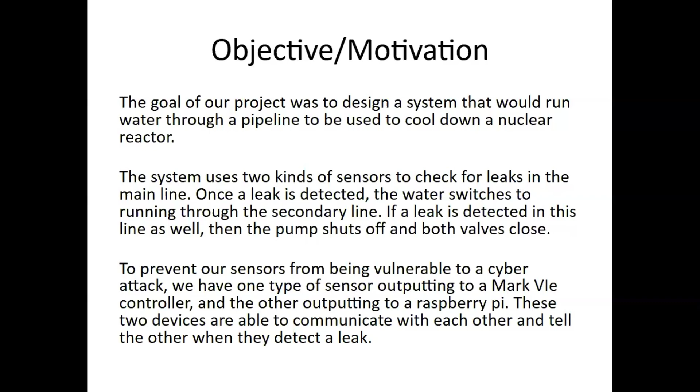To prevent our system from being vulnerable to a cyber attack, we have one type of sensor outputting to the Mark VIe controller and the other outputting to a Raspberry Pi. These two devices are able to communicate with each other and tell the other when they detect a leak. So if one is messed with, the other should still be working properly and is able to tell the first system that there's a problem.

Our project goals and deliverables are that the system needs to be able to detect a leak in the pipes and shut off the system as needed. It needs to control flow rate based on these readings, and it needs to be secure from the outside environment and from cyber threats. We needed to have an emergency shutoff and have it be operational in case of environmental or cybersecurity issues.

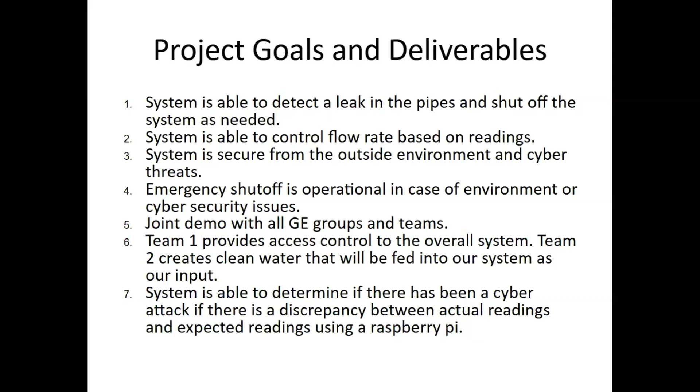We also needed to have a joint demo with all GE groups and teams, where Team 1 would provide access control to the overall system, and Team 2 would create clean water that would be fed into our system as our input. Our system also needed to be able to determine if there had been a cyber attack if there's a discrepancy between the actual readings that we were getting from our sensors and the expected readings we got from the Raspberry Pi.

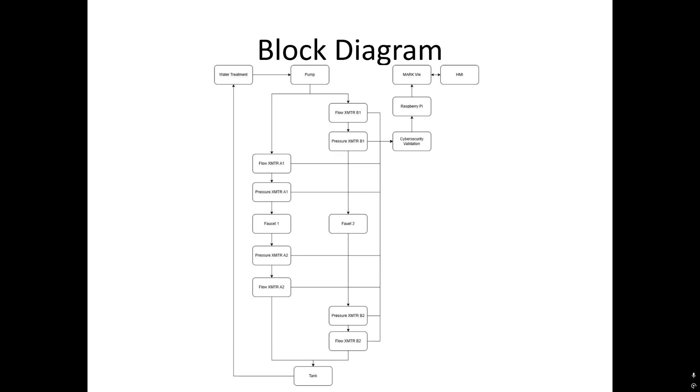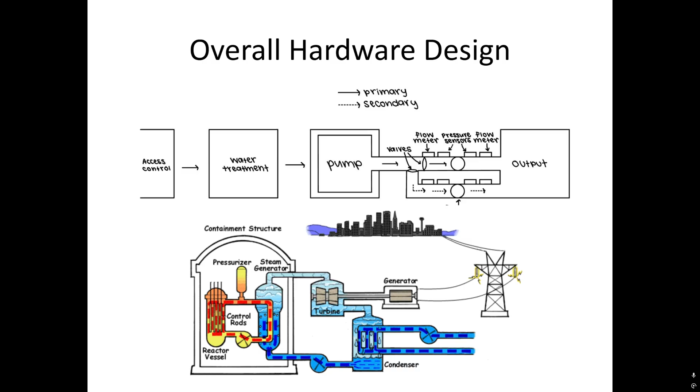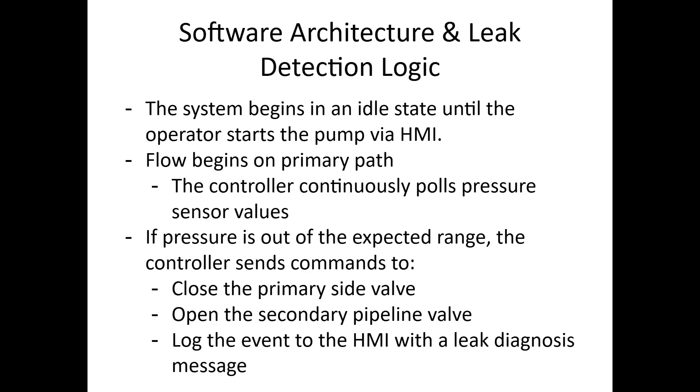So here we have our software architecture. The system begins in idle state until the operator starts the pump via the HMI. Once the flow begins in the primary path, there are multiple pressure sensors being polled. And if the pressure is out of the expected range, then it'll close the primary side valve, open the secondary side valve, and log the event in the HMI. If the secondary line leaks, the system then just shuts off. It closes both valves and shuts off the pump.

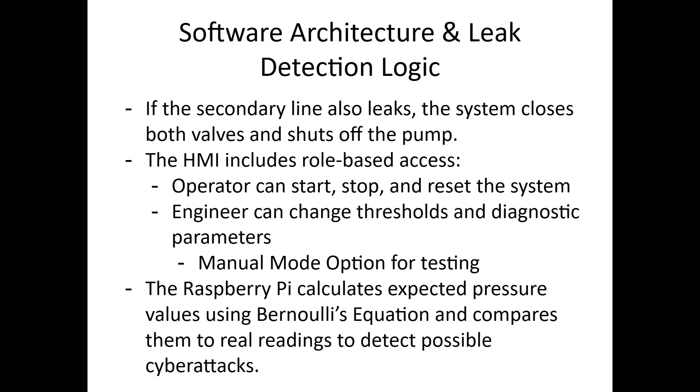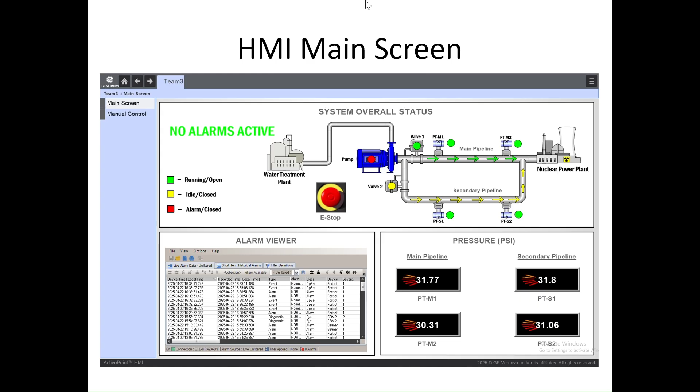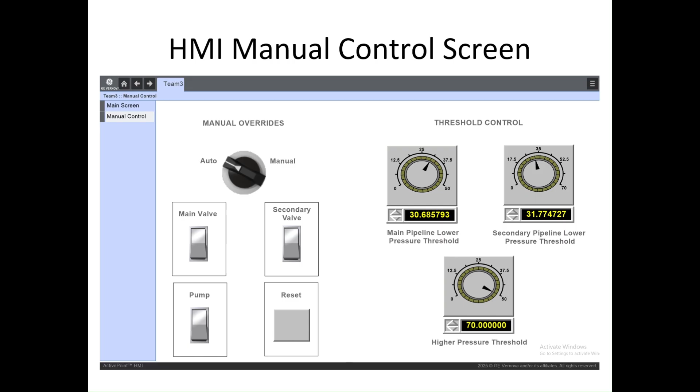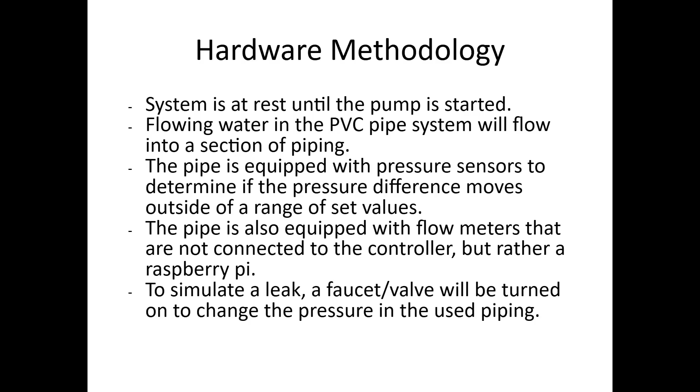Here for the hardware methodology, our system will remain at rest until water is pumped through it. There are pressure sensors and flow meters throughout the system so that when a leak is simulated, it will be able to tell and then thus send a message to the HMI and the controller to fix the issue by opening and closing valves.

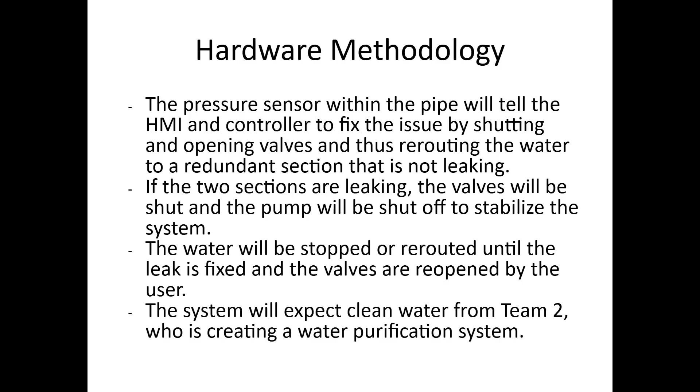And if both sections are leaking, then the valves will be shut and the pump will be shut off. And once the water is stopped or rerouted and the leak is fixed, the valves are then reopened by the user. And our system is supposed to collect clean water from Team 2, who's doing a water purification system.

For the software methodology, the system remains idle until the operator requests to start the pump. At any point, the operator can press the stop pump button, which serves as a kill switch to immediately halt the system. While the system is active, it continuously monitors pressure sensor readings.

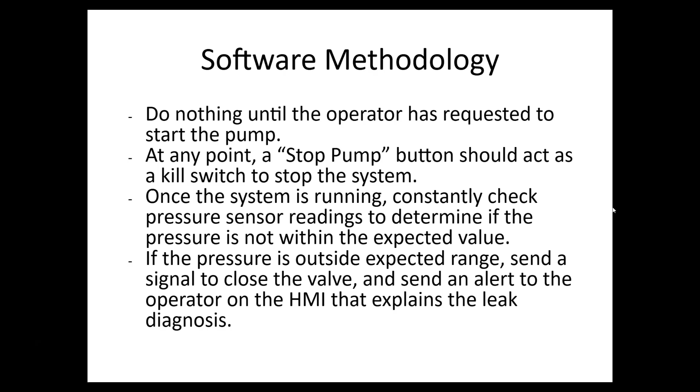If the pressure deviates from the expected range, the system will close the valve to the primary pathway to contain the issue, and it notifies the operator through the HMI with a clear alert that includes a diagnosis of a potential leak. The system then opens a valve to redirect water to the secondary pathway. Pressure continues to be monitored to ensure there's not an additional leak.

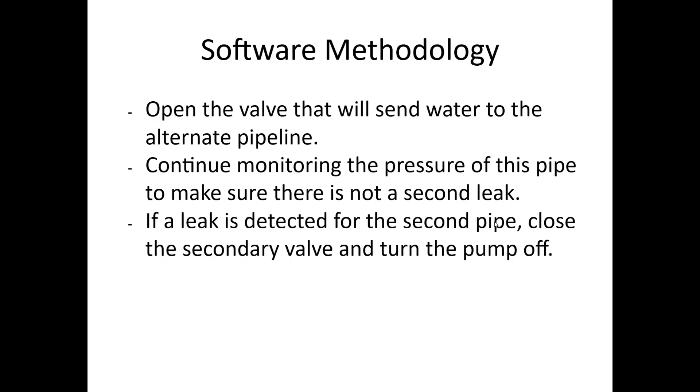If a second leak is detected, the system responds by immediately closing the valve to the secondary pathway and shutting off the pump to prevent further issues. Once the leak is resolved and the system is restored, the operator can restart the process. The valve to the primary pathway is reopened, the valve to the secondary pathway is shut, and the pressure will continue to be monitored.

To enhance reliability and security, we'll also implement a digital twin in Python. The digital twin will simulate the physical behavior of the system using Bernoulli's equation to model expected pressure and flow. By comparing the simulated data to the real-time sensor readings, the system can detect discrepancies and report any of those as a cyber attack on hardware devices.

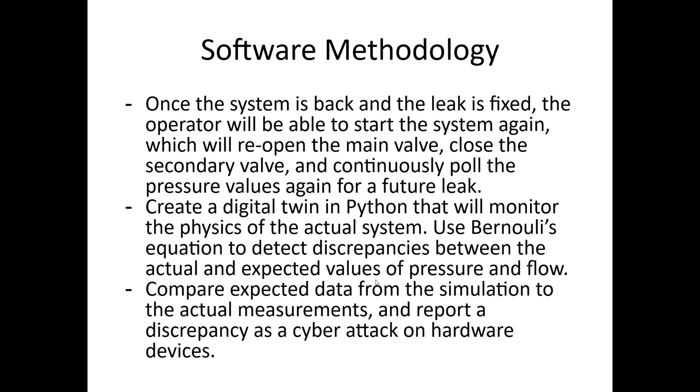For the cybersecurity aspect of our project, our main goal was to protect against false pressure readings. This was to make sure that someone didn't force the pressure high or communicate with our sensors in a way that would compromise our system so that we'd have a leak but the pressure was reading normal.

To do this, we implemented flow sensors that were connected to the Raspberry Pi rather than the controller, and then we connected these two devices together via Ethernet and then utilized Modbus TCP to allow these to communicate with each other and send system information, pressure readings back and forth.

To do this, we used Bernoulli's equation to calculate expected pressures based on our flow rate. So this is a physics concept, basically says that these things should be equal on either side of the equation, and everything in here is constant except for the pressure and velocity, which is calculated as the flow rate.

So we took our pressure readings in real time and then compared them with our flow rate readings in real time to make sure that the pressure readings were what they should be based on the math of the other pressure sensor. So if one of the pressures downstream was forced high, but there was no flow there, then this physics equation would tell us that there has been a compromise to our system because the pressure is not what it should be based on the equation.

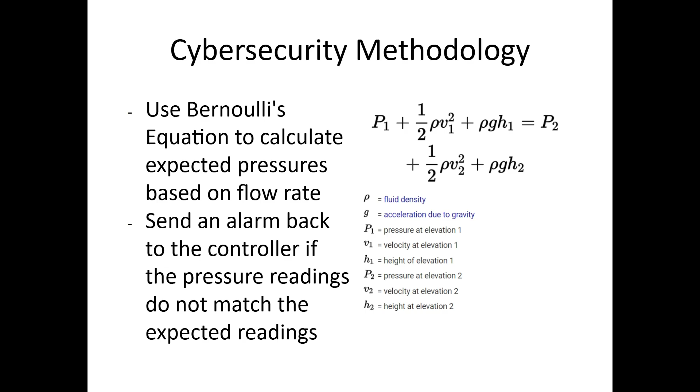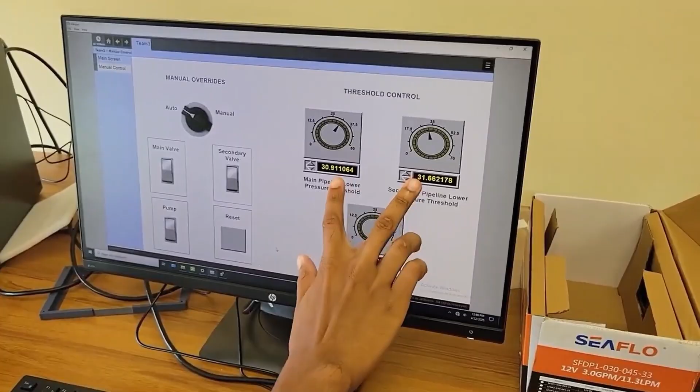And here's our demonstration video. So we're going to start off from the panel here to the HMI screen. We'll start by running the reset command, and you'll see it's going to zero our thresholds here. And then it's going to set them automatically based on ambient pressure right now.

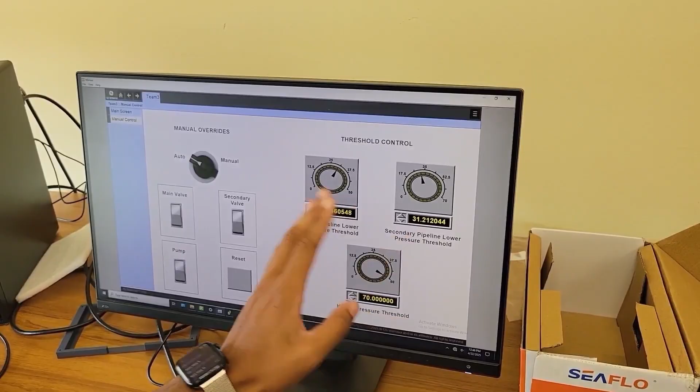And the idea is these limits for each of our main and secondary sides, those are going to determine where pressure can drop below. If it drops below these limits, that's when we'll start to get errors. And then I'll start running the pump here. The pump is on. Right now we're running from our tank through the main side and back to the same tank, so it's a kind of circular system there. After 10 seconds, the pressure will stabilize, and then we'll be detecting errors.

So if you open our simulated leak faucet, hear that click, that was us switching to our secondary side now. And that's because the pressure dropped at the far point when we simulated a leak. And now if we simulate a leak on the secondary side as well, you should hear the system will shut off just like that. System into manual mode.

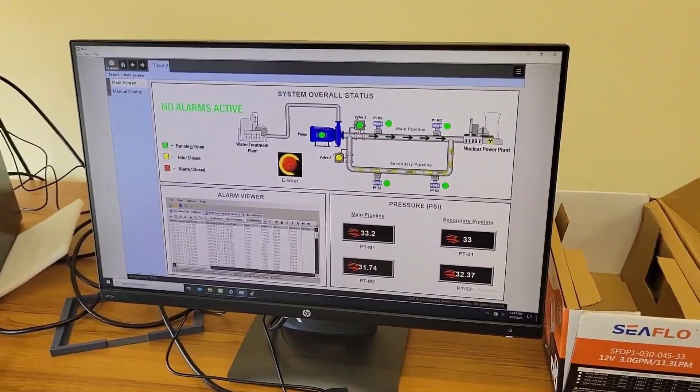And now I can open and close each valve manually, whenever I want. We have a safety feature. If you close both valves, the pump auto shuts off because you don't want to be running the pump down no open pipe. But if I open one valve, the pump will turn on. This is in our current running state, and this is just saying that we're running down the main pipe, and that our secondary pipe's in idle state.

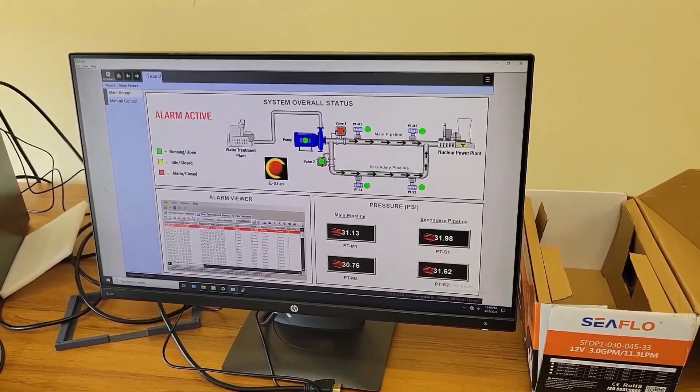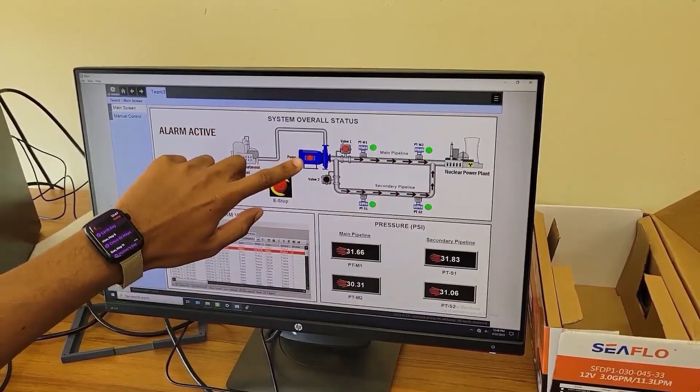If we go ahead and throw that first leak, you should see the main side should have an error. There we go. Indicated by the red meaning the valve's closed, red here meaning that pipe's in error. But now this is green and this is green instead of yellow. This means it's gone from idle to active. This means we're running down the secondary side. And then if we throw the secondary leak, the pump should stop, and you'll see both sides are red, as well as the pump icon here is also red.

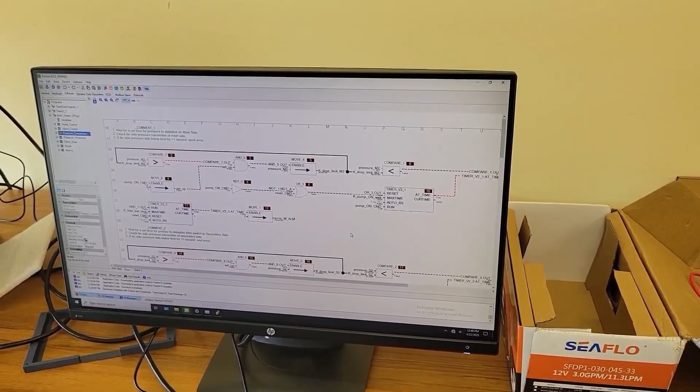So we're gonna start running the pump down our main valve. And I'm gonna go into our software here and go into our pressure comparison. And I'm gonna set our pressure here to be at constant 34, which is above our threshold. And so when that happens, if we pan over here and we simulate the leak, the software cannot detect it. So this is like we're in a cyber attack state. And in this situation, we have our Raspberry Pi here that is checking with Bernoulli's equation, and it will shut off, you just heard that, the system. And so even in the case of a cyber attack, we do have protection against that as well.

In testing, our system performed according to design expectations and safety requirements. We first introduced a simulated leak into the main pipeline. The controller correctly detected the pressure drop, automatically closed the leaking valve, and successfully rerouted water through the secondary line. Next, we simulated a second leak in the redundant line. As designed, the system recognized the failure and executed a full shutdown, closing all valves and turning off the pump to prevent further loss or damage.

In parallel, we established a Modbus TCP connection between the Mark VIe controller and Raspberry Pi, which allowed us to cross-check live pressure sensor values between the control system and our digital model. The Raspberry Pi ran a Python-based digital twin using Bernoulli's equation to compute expected pressure values. During testing, this model reported discrepancies that aligned with our injected fault, effectively simulating a potential cyber attack scenario.

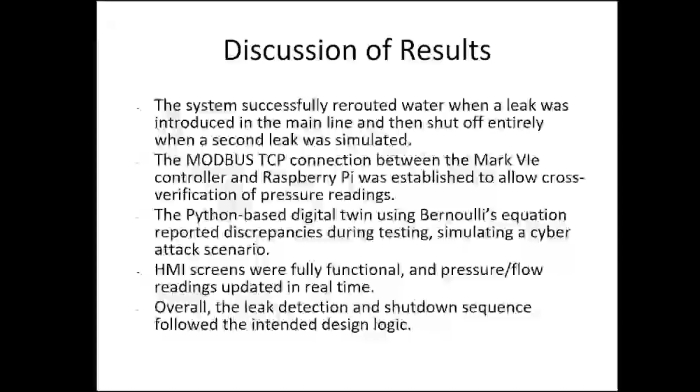Meanwhile, the HMI operated smoothly, displaying real-time sensor data and allowing user interaction for system control and monitoring. Overall, the entire leak detection and response sequence followed our intended logic, demonstrating both functional reliability and cyber awareness in a simulated nuclear cooling pipeline environment.